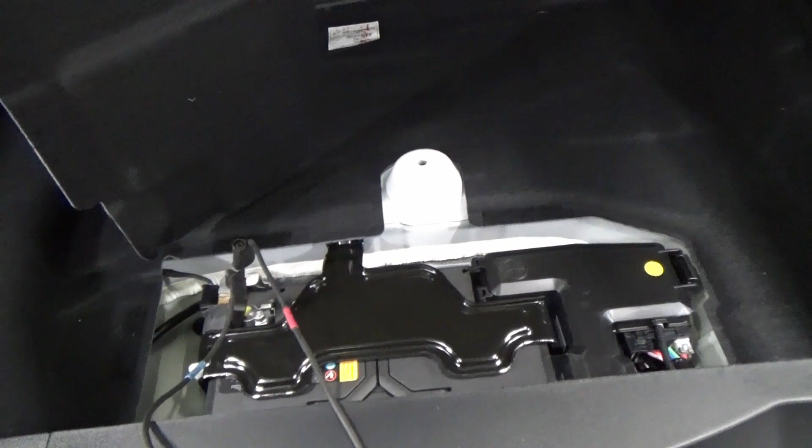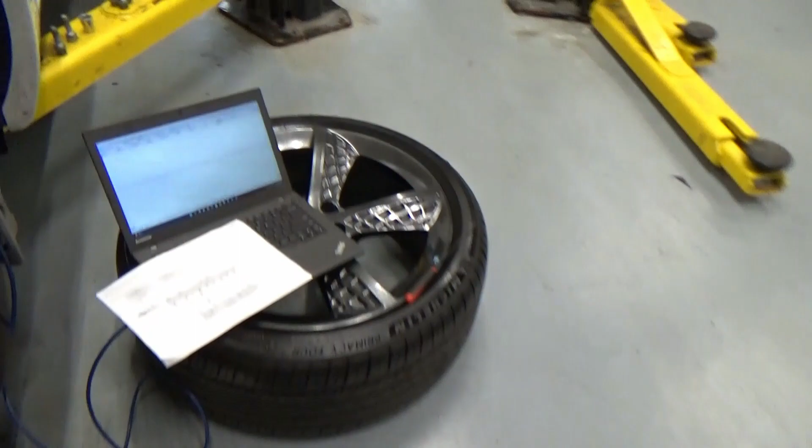And I noticed that this guy is loose. As you can see that. Oh my goodness, I think our problem will be that one. So I'm not gonna do anything yet there, so I'm just gonna clamp it through here, and let's see our voltage reading once I start this. So let me just stop this, and then I'll set it up.

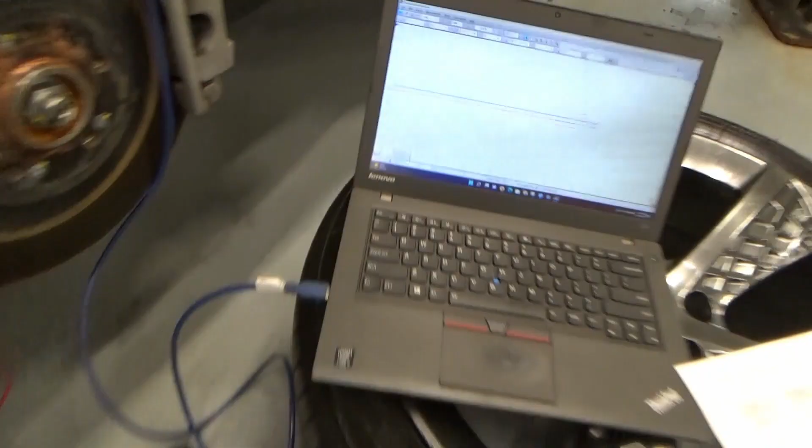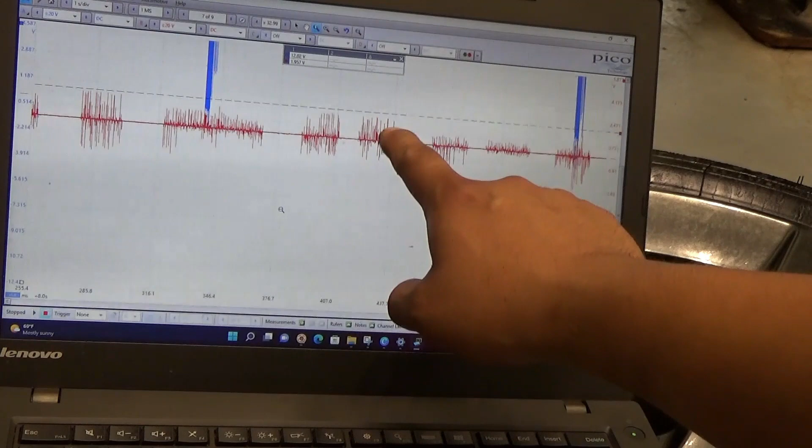Okay, so here's our reading. I'm gonna go back to our first few frames when the car's... So this is the time that it tried to start, and we got our reading voltage here. The first one at 12 volts, but my red trace is still doing something there. That's a ground one, right?

So it's either the B circuit is supplying ground, and the A is the, what do you call that? The A will be the supply voltage from the computer. I'm not sure yet, but the way I can see it, this is how it capture.

Same thing here, the last capture, that before it failed, right? Because after this slide here, this is the time when it just went to 0. It says failure in the cluster. So we got a 12.58 running voltage on the blue trace. Our red will be, there's so much spike on the red one. I can see here we got 2 volts or something like that, 1.9.

So I don't know if that's a reading or that's a voltage drop, because we just found out that our ground is loose on the battery cable. So what I'm gonna do, I'm gonna try to tighten that cable. I don't know what happened there. Maybe they replaced the battery. And then let's see our capture again.

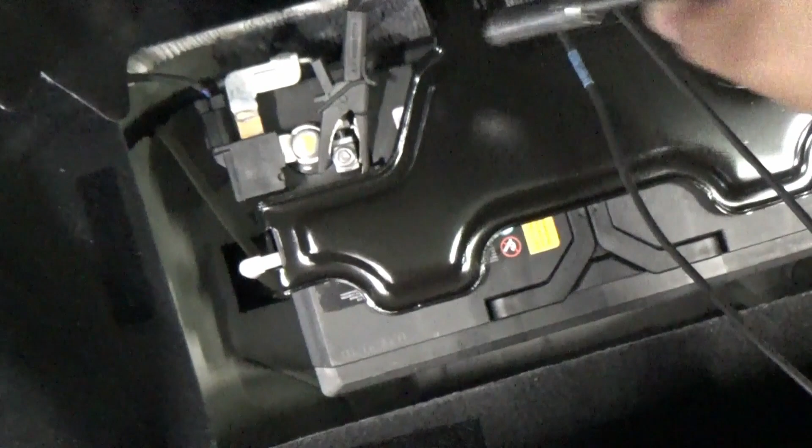Okay, so I'm just gonna tighten this guy here, because as you can see there, my wrench is turning. Let me remove this guy first. Okay, that's tight. Let's just double check our ground. Okay, that's good. So connect that again. And then let's do the capture again and see if we got improved voltages now.

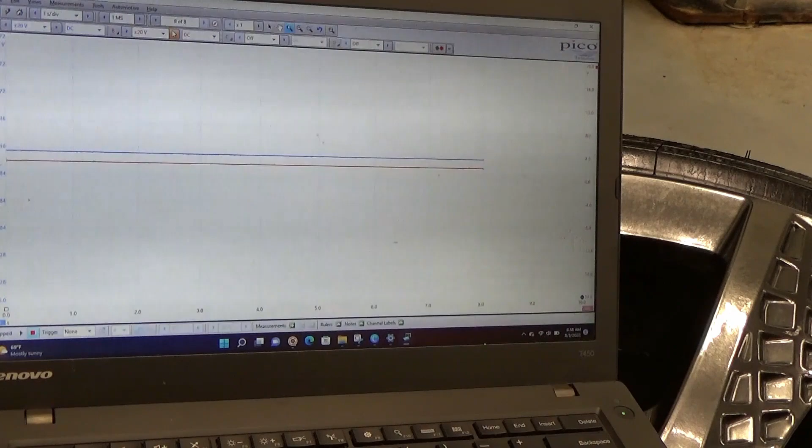So right now we still have a failure because I can see that it went up and down and it turns off, and our cluster is showing failure there.

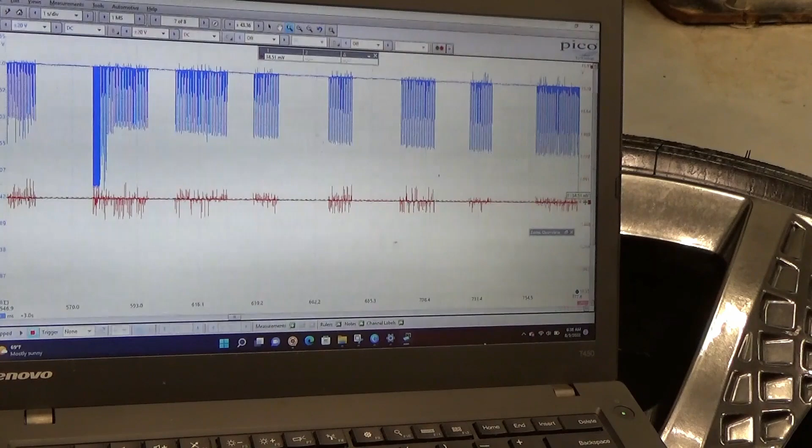So right now my spikes on the ground side, or the red one, is still too much. But the way I can see on the blue trace, it's like it's going to the ground. Let me go zoom in more. What's going on there? And we got some dropouts.

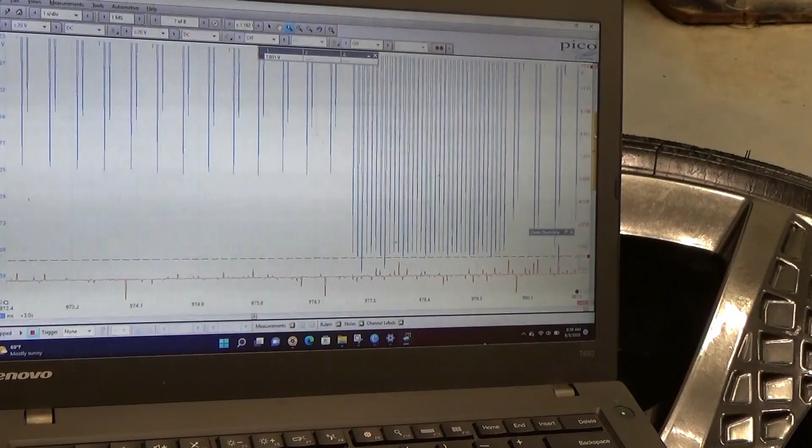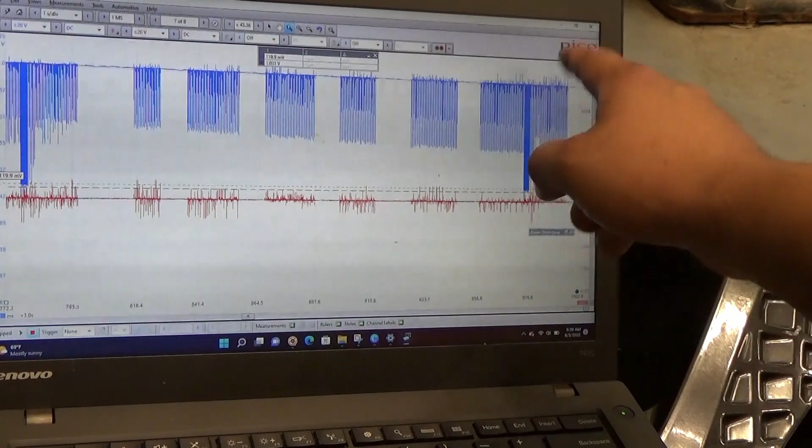I think the best way for me is, I think I have to look for another car and then test it if we have the same pattern, or this pattern. Right now I have this one going almost to the ground. It's all going to the ground. Let me measure it. So it's almost going to the ground, like all the way to the ground. So I think it's seeing something. I'm still not sure what's causing that, or if that's normal. Right, so I'll get back to you.

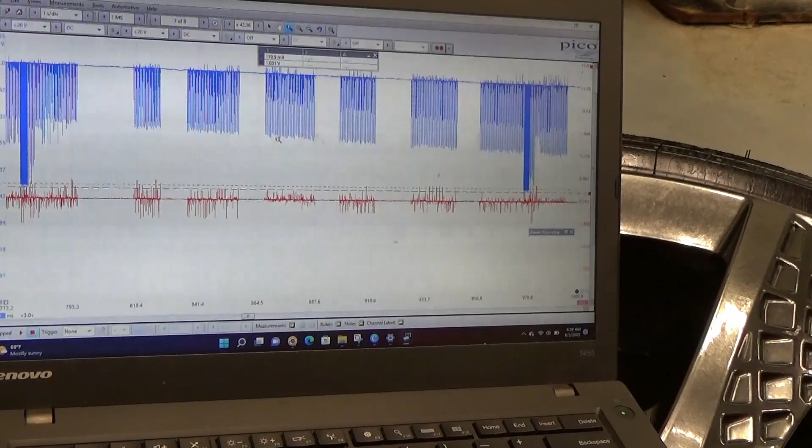Alright guys, so right now I'm testing the GV80 because they have the same electronic LSD. So on our right side, that's our good known. On our left side, that's our problem car, the GV70. So first is, during ignition on, we'll just measure the voltage. So both blue and red are reading 12 volts on our GV70, and our GV80, it's the same thing, reading almost 12 volts on each side.

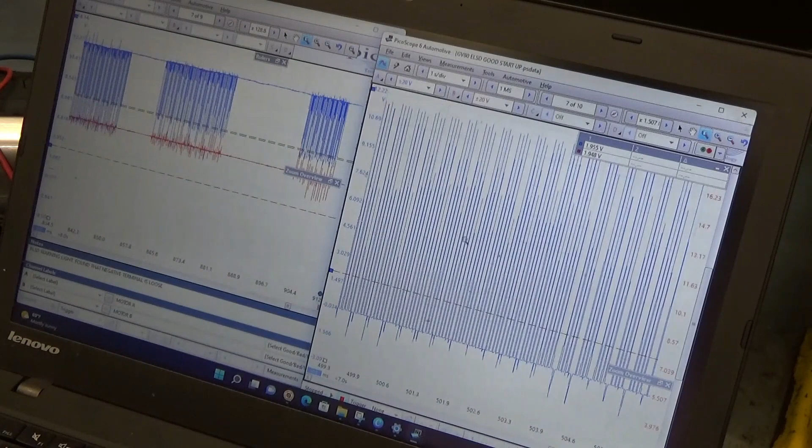But when it starts to run, I'm gonna zoom this in. And then I zoom in this GV80. Oh, that's too much. Okay, so this is the pattern that I got on our GV80, and this is the pattern I got on a GV70. Right? So it's two totally different patterns.

Right? A red trace, as you can see. This one has some spikes there, but they're almost the same. It's reading around 0 volts, right? So now I know that there's something going on my GV70 problem car, right?

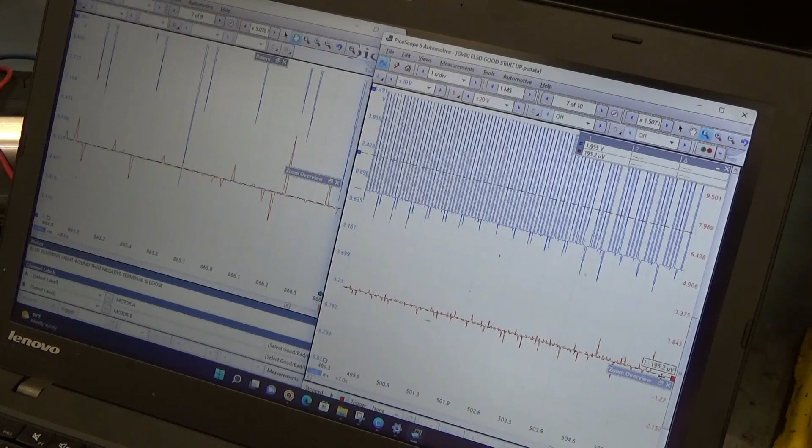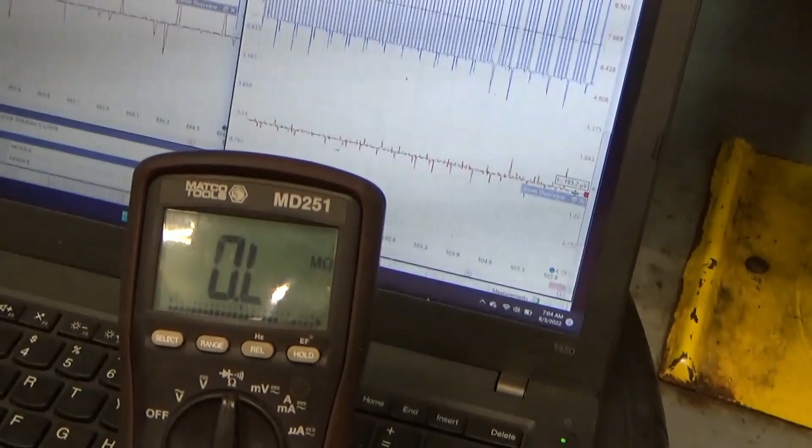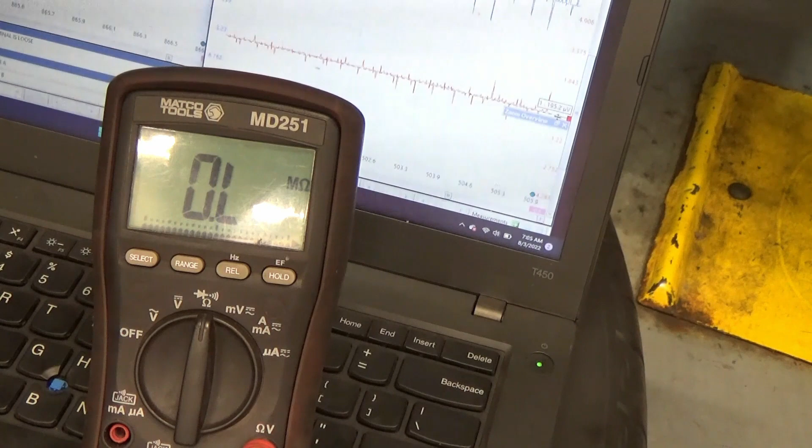So since I'm on the GV80 now, I just want to check our resistance, to just double check because I don't know the spec on that one, right? So here's my multimeter. So I'm doing the same test on checking that motor circuit, the A and B. So this one is reading 1.1 ohms. As you can see that on our GV70, I remember it was 17 ohms, but we'll go to that car and let's check. So I'm gonna go to this car.

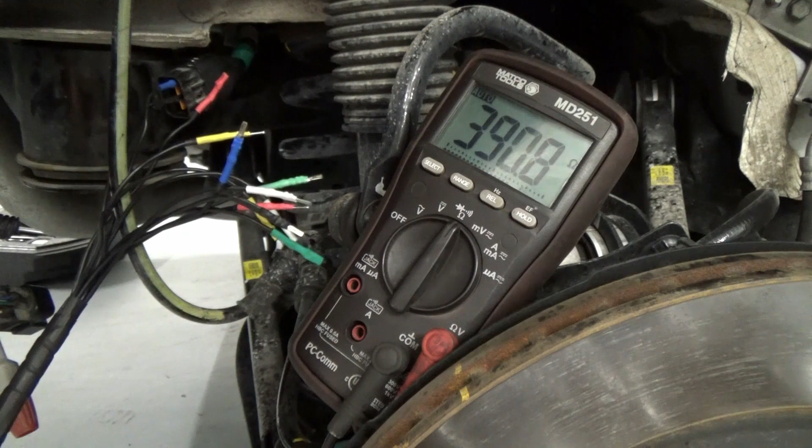Okay, so we're back on our GV70. I'm just gonna test my test leads, so that's good. So I'm going for blue and black. So as you can see there, last time it was reading 17 ohms. Right now it's reading 391 ohms. So definitely we got some problem on our motor, right?

So now I'm gonna try to swap these motors here, right? And see if we can swap it, or I have to check our parts catalog if that's separate or we need a whole differential. Okay guys, so we're removing the actuator, right? Since it's back order, I'm just swapping it from a good known car, and we'll see. So it's just an Allen. I'm using an H5. So first we're gonna remove the connector.

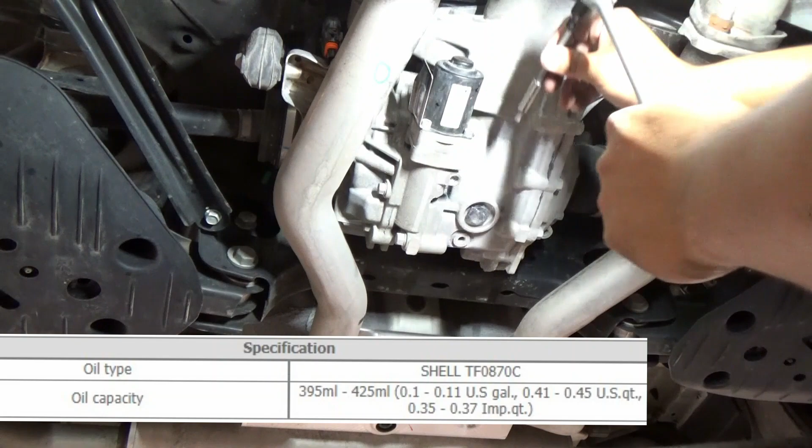So I'm just using a pick now just to lift up the tab. And then if you have the new part, just in case you're gonna be replacing this, just make sure it's ready, because there's gonna be fluid coming out here, so that you don't have to put or apply more fluid when it's done, right? You just have to put some, because I think these fluids are so expensive because they're LSD fluid, right? So there's just 4 bolts holding it.

So the upper bolt on this side, it's not coming out. I think the whole assembly is gonna come out, because something from the differential is blocking it. Just wiggle the thing. Okay. So let me grab the other one to prepare it. Okay. Actuator is in, so we're just gonna put this shield here.

So at least in the parts catalog, this is not the whole assembly, which is good. Because if you need just the actuator or the motor, you don't have to replace the whole thing because that's too much. And that's gonna be an expensive replacement. So I'm just gonna tighten this.

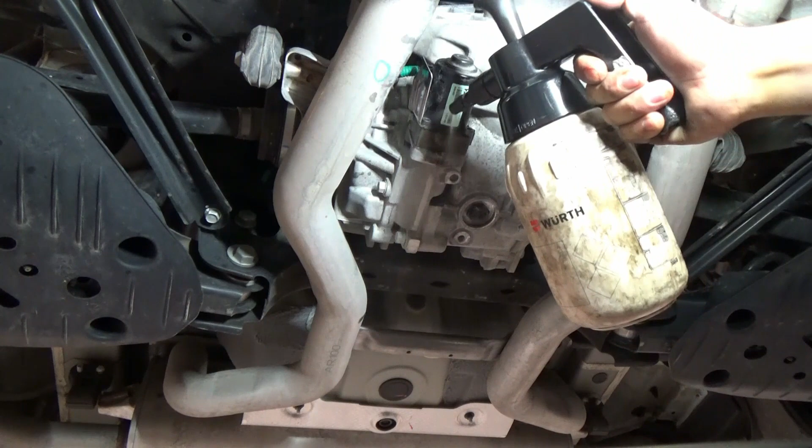Okay, so that's tight. You have the brake cleaner? Brake cleaner. So I'm just gonna put our connector back in there. And I'm just gonna top it up with LSD fluid later. And then we're gonna check our operation on this actuator. Okay, so we're just gonna do some testing again. We put our good known actuator there, or the motor, and then let's just check our voltages again. So I'm just gonna do ignition on first.

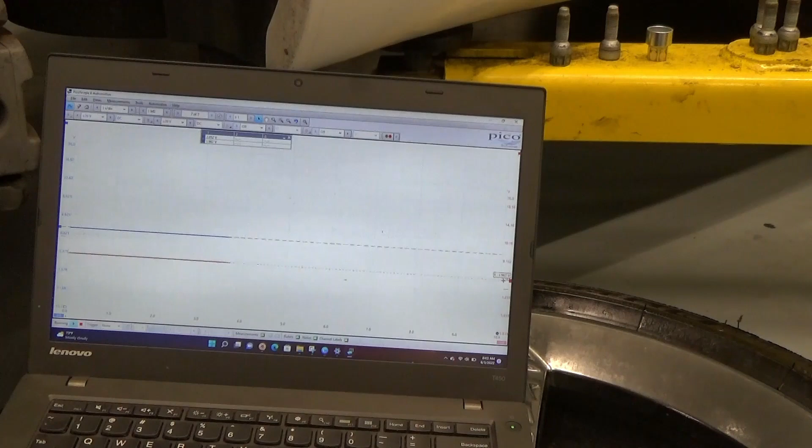So ignition on. Let's see our... oh. So blue and red, the motor A and B circuit is reading almost the same, 2 volts. So now I'm gonna start the vehicle. Okay, so now it's starting. So we can clearly see the pattern is way different than before. Okay, so as you can see there, I don't think I have a warning light now.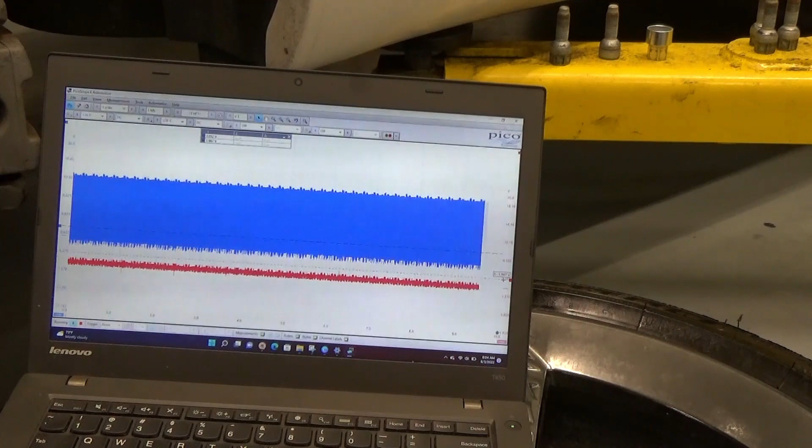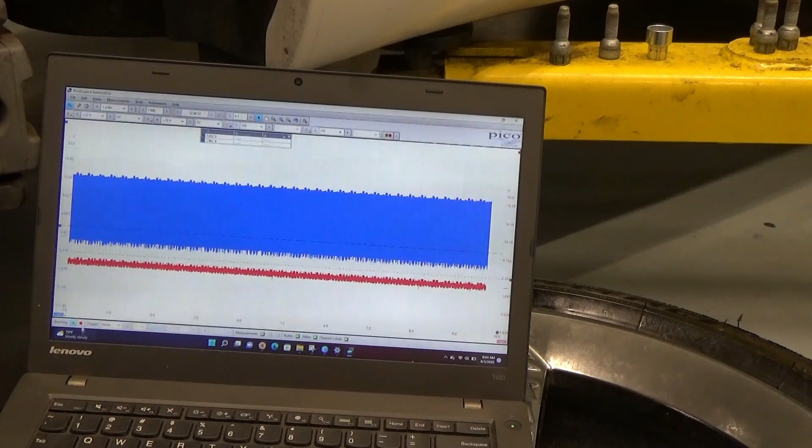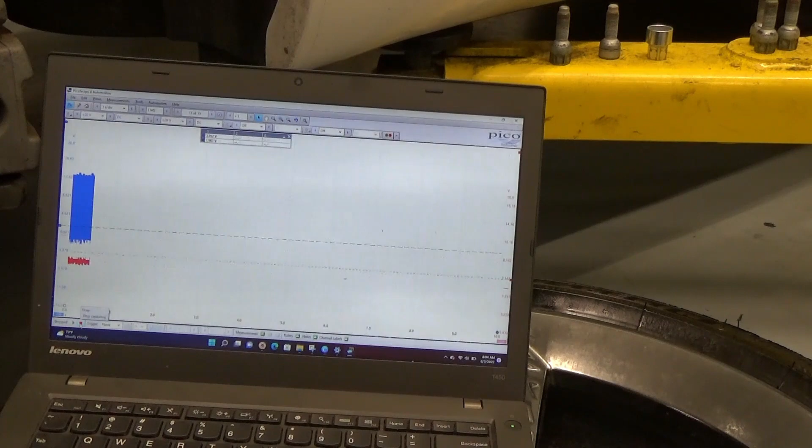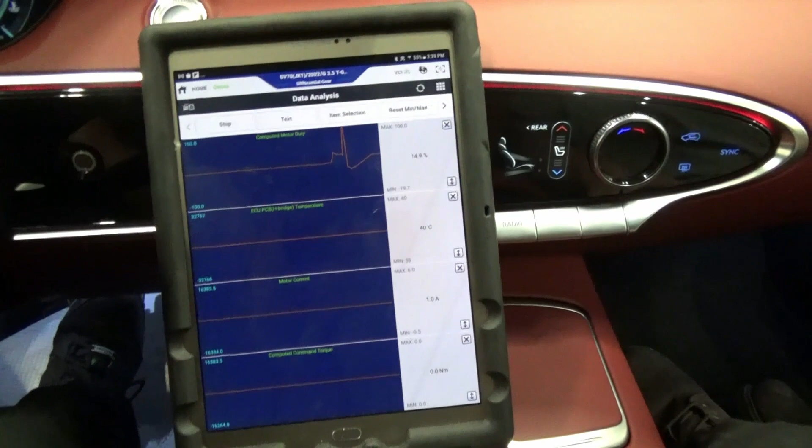So I think this is fixed, so I'm just gonna go test drive this vehicle and double check our operation of our rear differential and make sure that there's no warning lights, and I'll just put everything back together. Alright guys, so after we put everything back together, replaced that actuator, also make sure before you do all those kind of jobs, because you can't really tell if you will lose some oil.

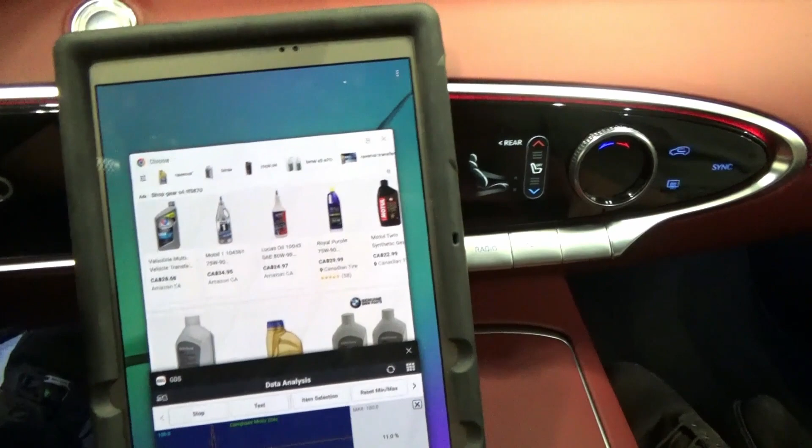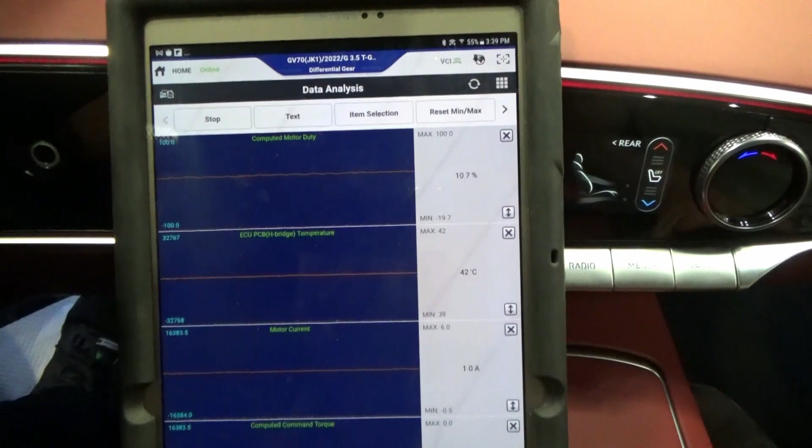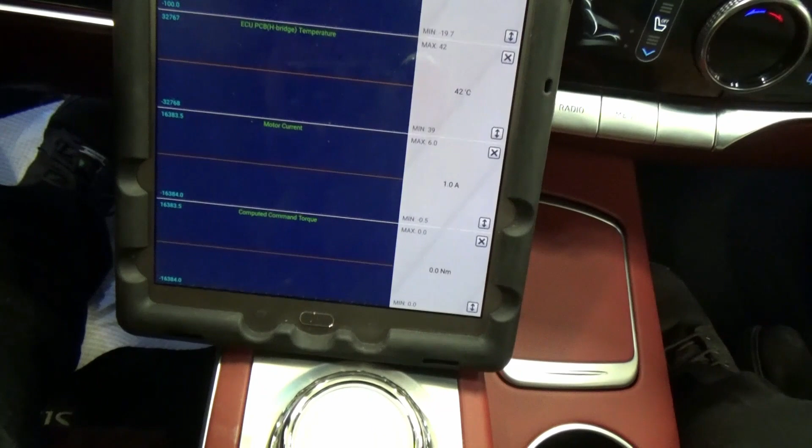So the spec for that is, they call it gear oil TF0870. As you can see on these pictures here, BMW uses it, right? And when I went to the service information, they said that ELSD gear oil should not be replaced or checked. So in our case, because we removed that actuator because it's replaceable, we just top it up for now, right? But as for the service information, the oil is not serviceable.

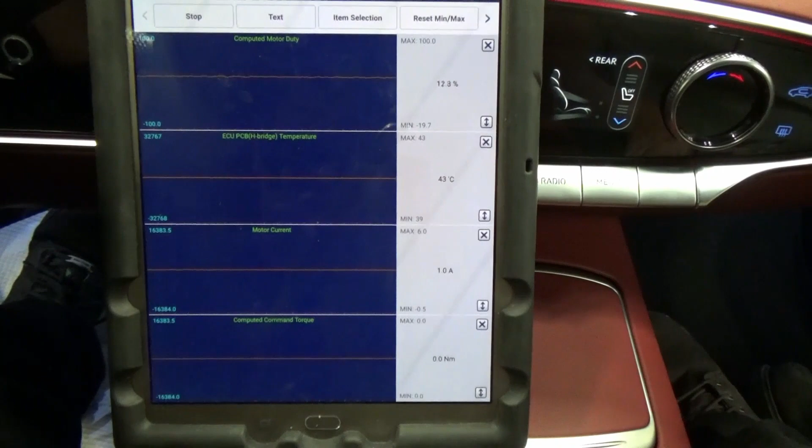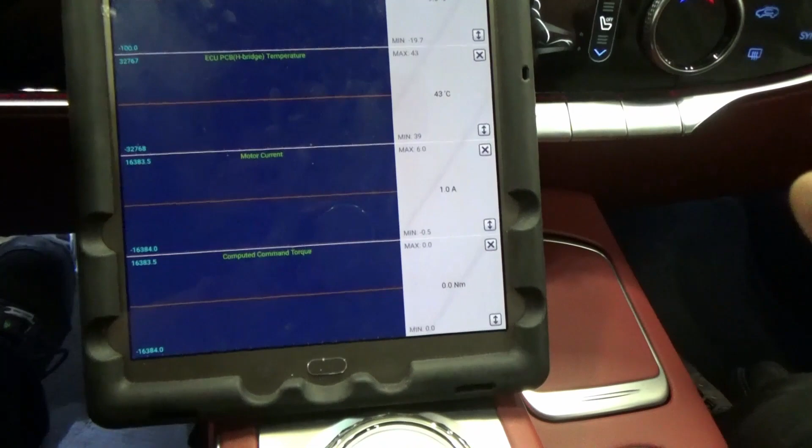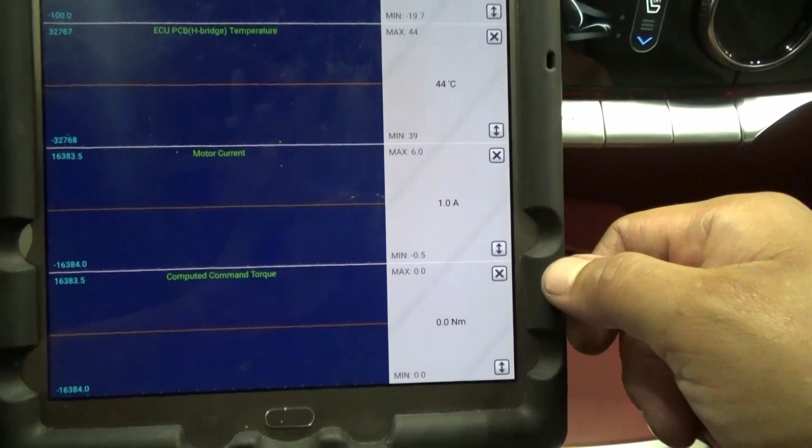So we can't really do anything, we just have to top it up, because we're not replacing anything on that one, just because we lose a little bit of fluid. So as you can see on our reading right now, on our motor current, we got a reading of 1.0 amps, right? And we got our computed motor duty 11%, which is around the normal reading for these vehicles. So I'm just gonna go for a drive and let's see.

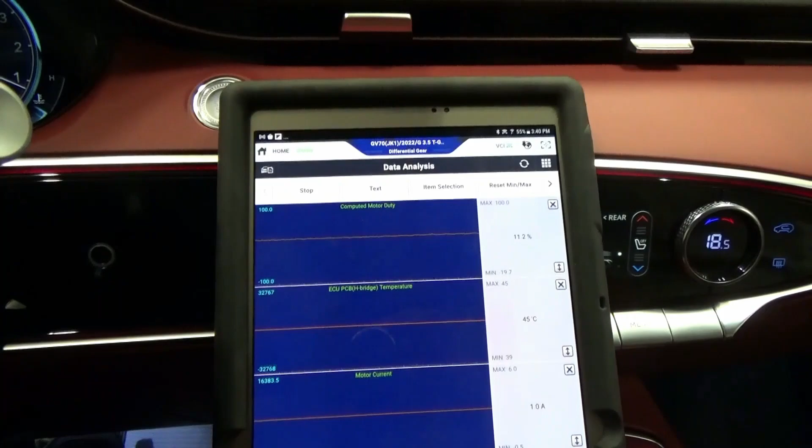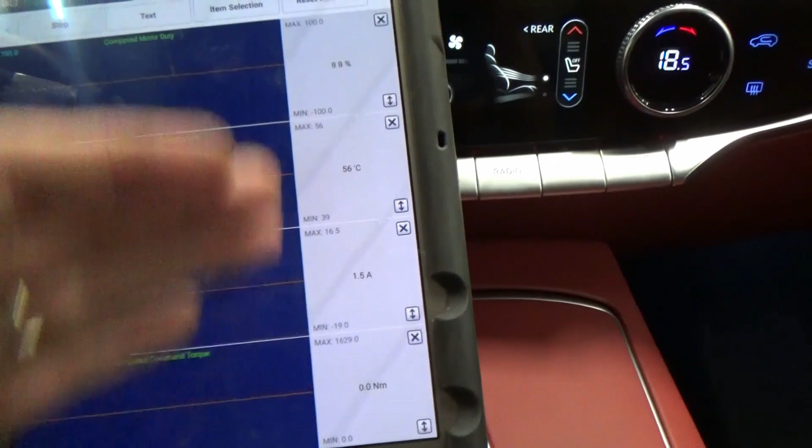Okay guys, so I just went for a test drive. So far everything is good, no warning lights there, and all our data readings are all normal, right? So that's it guys. We knew that we have a possibility that there's a problem with the motor for that differential. We're just double checking all the wirings from the computer, right? From the computer going to that harness. And good thing I got some good known cars here to compare.

We knew that we have high resistance on those 2 pins on the motor. So I don't know, maybe the brushes there. So we replaced it with a good known one, and everything is working now. And I guess that's about it.